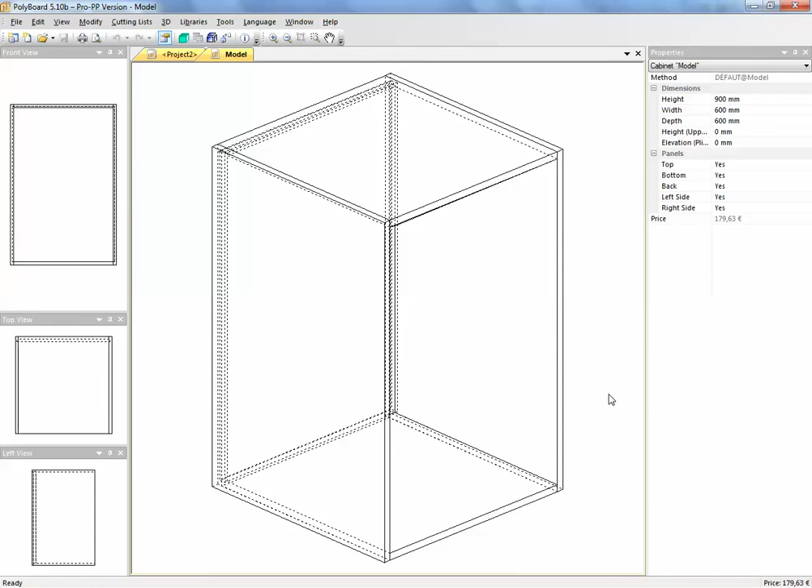Let's, for instance, say that we want this to be the base cabinet. So on this base cabinet, let's put in an elevation with a plinth of 100mm. Let's put in underneath here a plinth and set this back, say 50mm, and let's put in a door, and say this door is hinged on the left side, so we have a door.

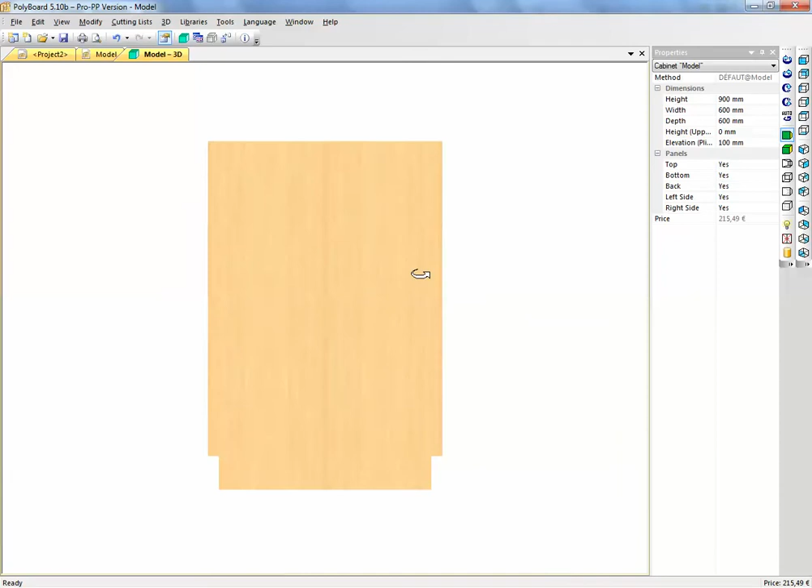If we have a look, we now have this cabinet. I can see that there's a door opening on the left hand side, hinged on the left hand side. And this is now the cabinet which, if I get out of this model edit mode, Polyboard will ask

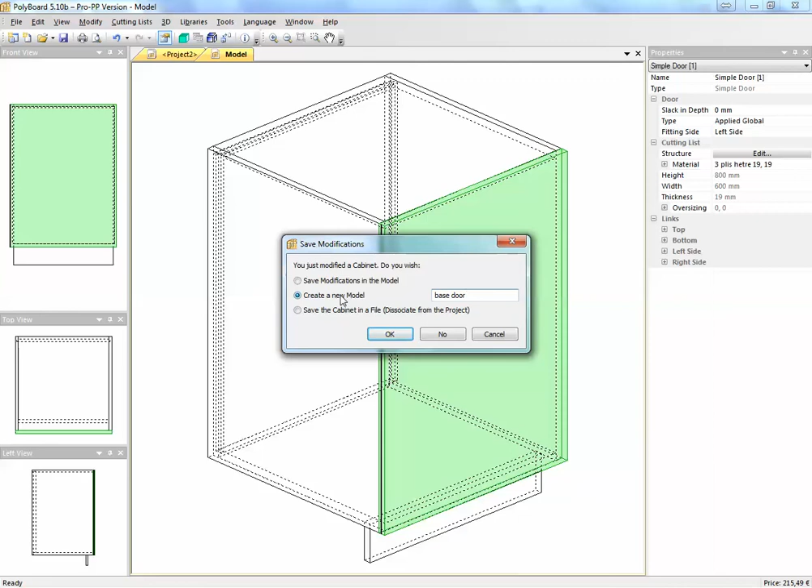me if I want to save the design in the model which is called model, or create a new model in which I will give a name. Let's create a new model and call it the base model with door. Base model with door. Or I can also save it as a cabinet file on my hard disk. But let's stay within the project mode and just create a new model with door called base door. Now base door appears in my model list menu.

I can drag it onto the work base, the work floor. I can change my viewing angle on the work floor, clicking like this. Okay, and now I have the base with the door.

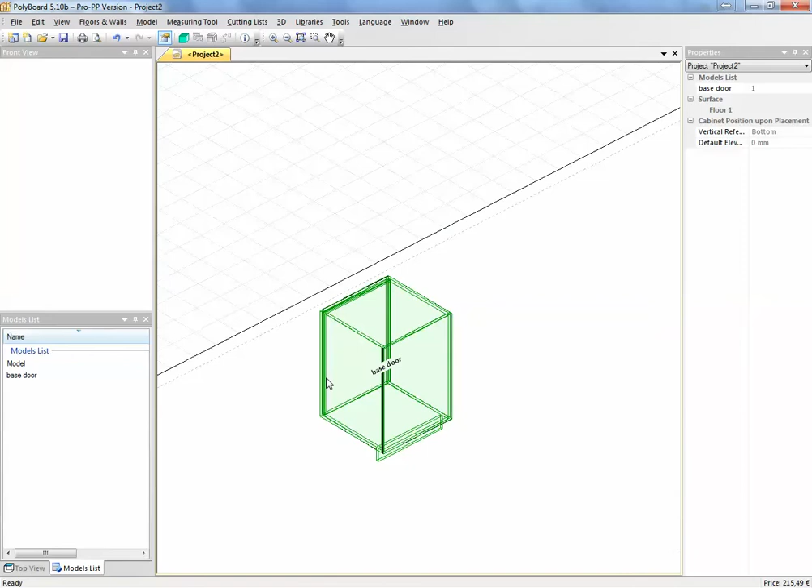Now imagine that on top of this cabinet I want another cabinet, but this other cabinet will have shelves on it. So I could take, for instance, simply the base model, click twice on model, go into editing mode. Let's put the same model. This time I will add shelves. Let's say I want, how many shelves do we want? Let's put just 2 shelves, probably be enough. 2 shelves in this base model.

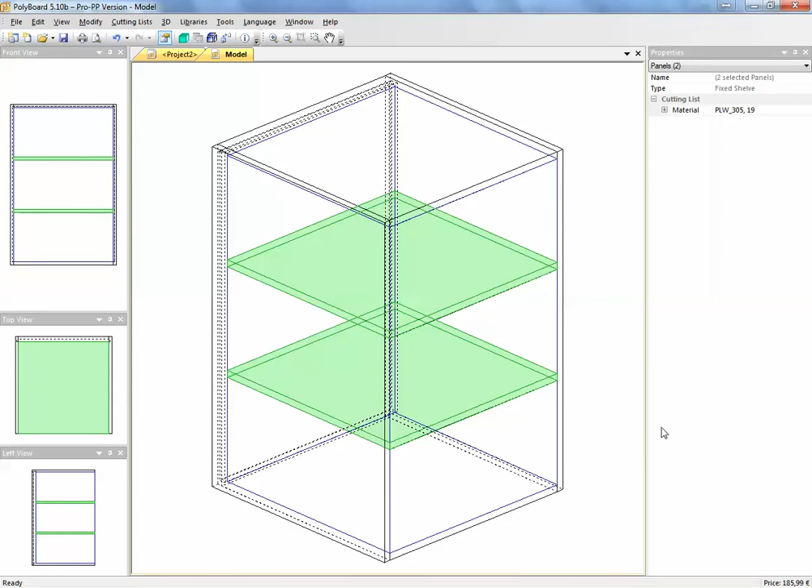Now when I exit editing mode and I want to create a new model, I'm going to put top shelves as a name. And now I have in my models list top shelves.

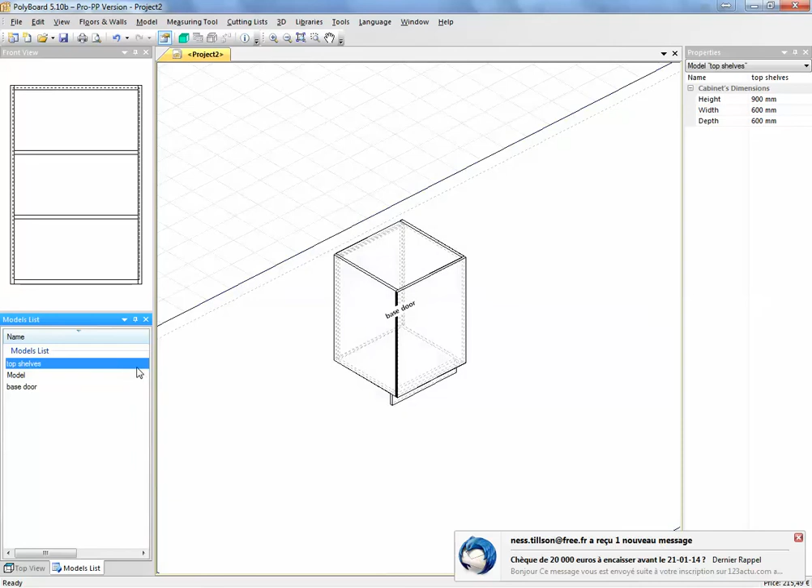If I click on top shelves, I can drag it into the project window, and you can see we have little clips that enable me to clip this particular cabinet onto different areas of the other cabinet. On one side I can clip it, snap it to the corner, and also snap it to the top. Let's snap it to the top. Now, snap to the top.

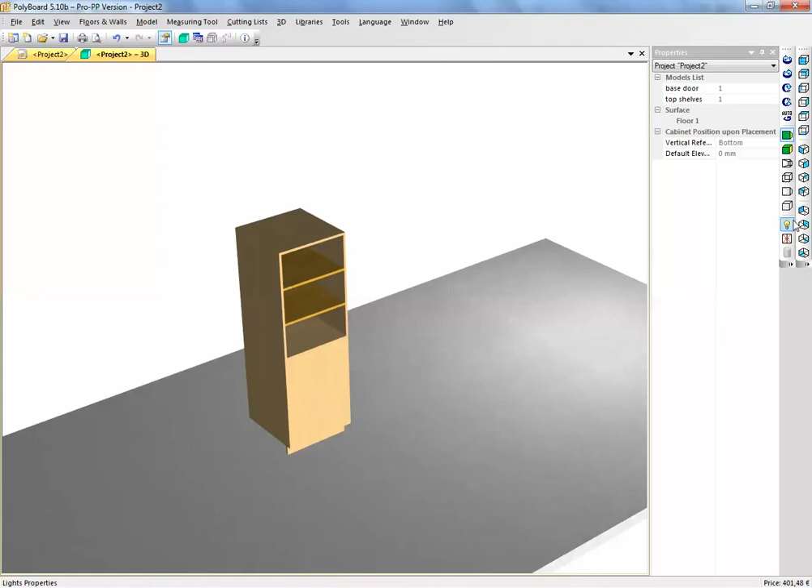This is now our cabinet in the project mode with the door and shelves.

Let's go back now and say that in this particular project, which is made up of several base cabinets, we also want a base cabinet with drawers. I just take my original model, click twice. I'm going to add drawers here, and click into a number of drawers, say 4 drawers. Let's put on some assembly details

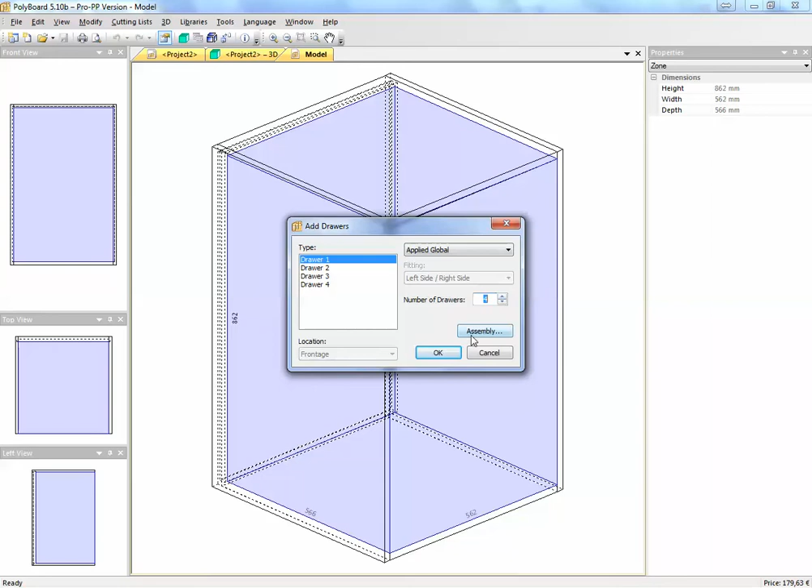so that it looks nice. I've added my drawers here. Let's now exit model mode, create a new model and call this drawers. Click OK. And now drawers appears in my models list.

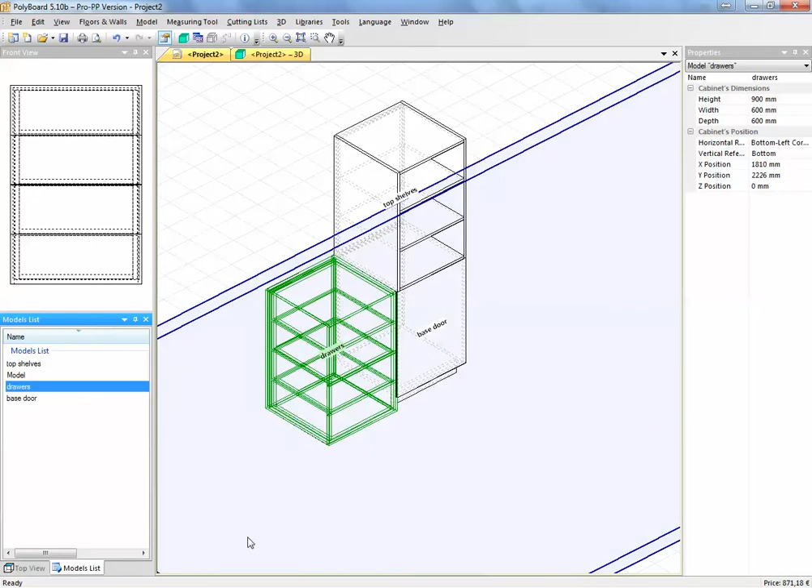If I take the models list, now the drawers will work the same way. I can clip it onto my model here. And we have drawers.

I can also, for instance, clip it onto the other side here. And we will see that when I clip these drawers onto the main cluster of cabinets, we have the position of this particular cabinet, its position in the properties mode, the properties window here, and we can see that

the X position can be given relative to different points on the cabinet. For instance, if we say that the point on the bottom left-hand corner is our reference point on the cabinet, we can give the vertical reference from the bottom, and its position here is at 900 because this bottom cabinet is actually 900 high.

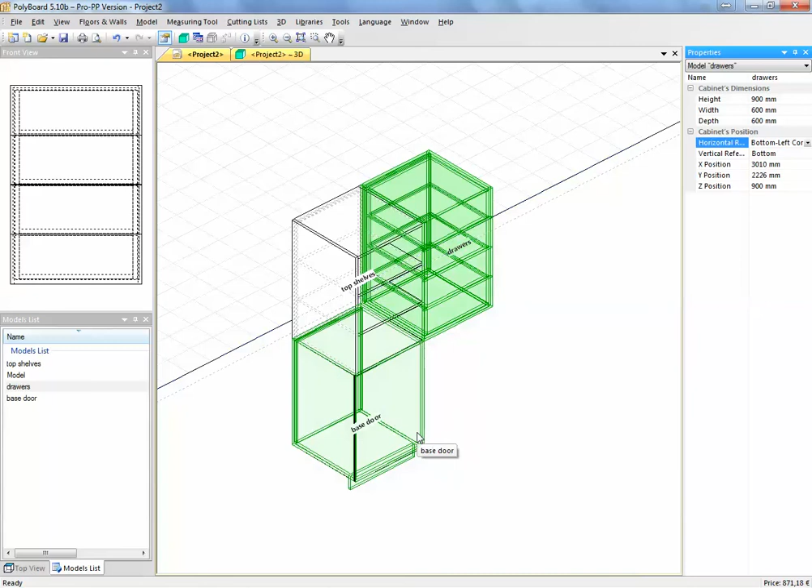But if I want to drag it down, I can actually drag it down. For instance, if I say I don't want it 900 but only want it 400, that will give me here, being 400, a space of 400 millimeters underneath here.

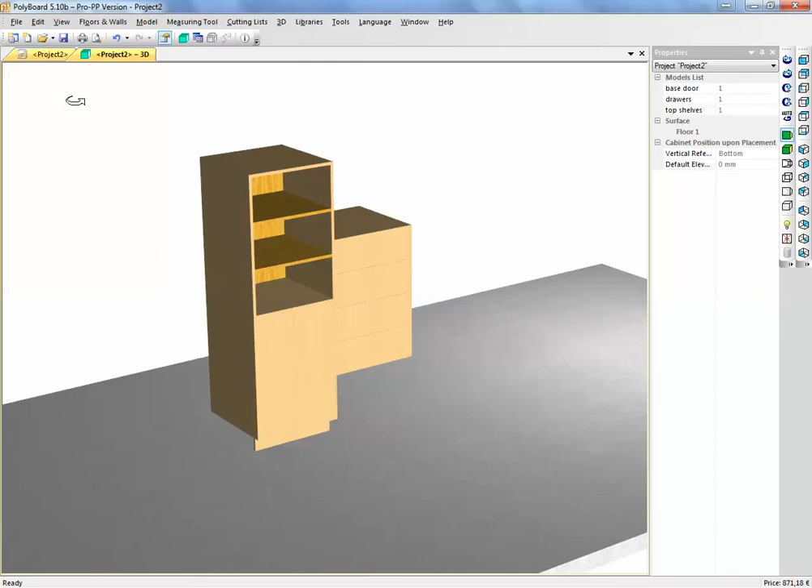which would be a position, for instance, if I had some sort of element that I wanted to slide in under here, and that enables me to reposition. I know that I have a 400 distance here, and I want to put another module in here, and this particular module, let's say I want it at 100 high with the plinth.

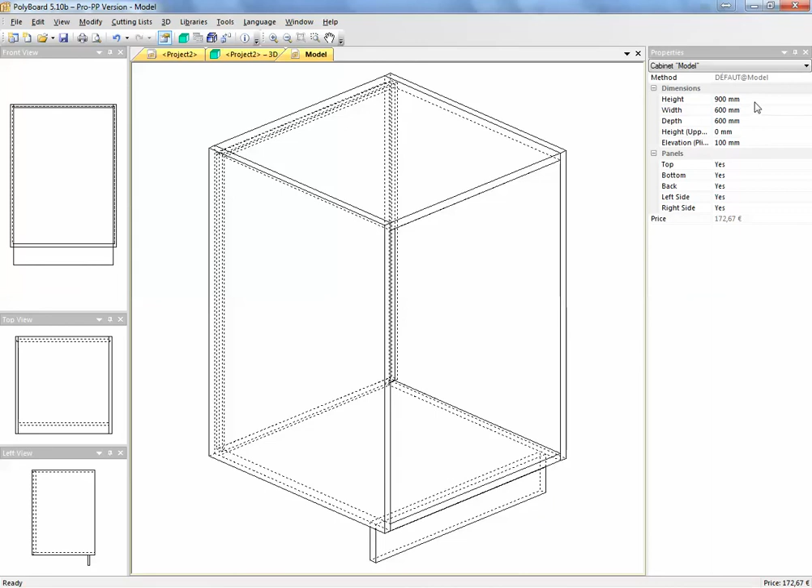Underneath I will add a plinth at the front, the same as the other one, 100. But the total height we need to be 400. So we have a box-like effect, and this particular model, I will create a new model too.

I will call it a box at 400 millimeters. Box 400 appears in my models list, and I will clip it in now to this area, and we have now different elements.

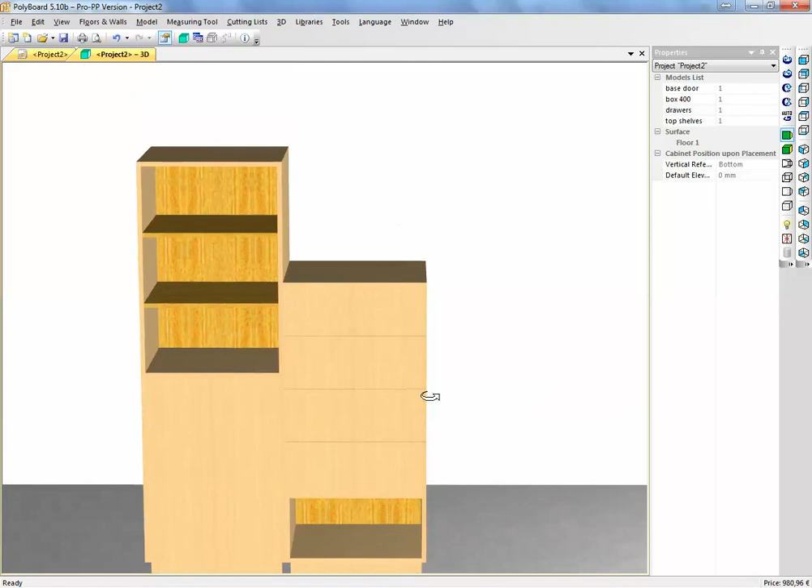I'm building up a cabinet which is made of completely different elements as I move along through the project. So if we open the doors, you can see how very simply this project mode enables you to build up modular projects which are in fact completely separate cabinets and can be machined as such.

So I hope that's been of interest to you, and I hope that showed you some of the very powerful but easy and simple to use modular cabinet making in the project mode.